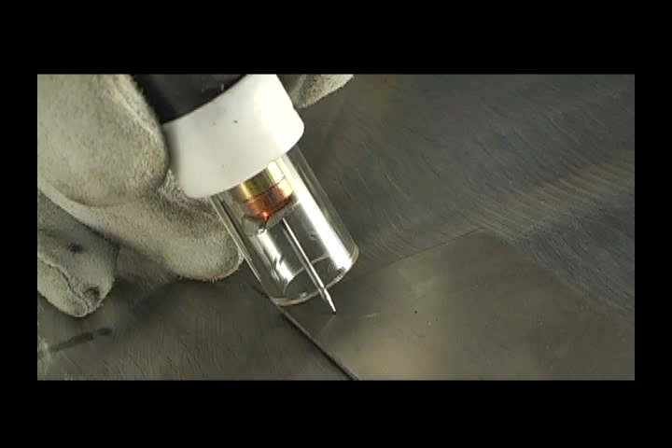We start the arc by the touch start method, which is easier than scratch starting and less likely to cause tungsten contamination. You touch the tungsten to the work, the machine senses contact, and starts the arc when you lift the tungsten off the work. One of the nice features of the 130 DC is the ability to remotely control the amperage by a foot pedal. This is an especially important feature for the novice welder as it gives you more control of the weld puddle and makes your welding much easier. Gas flow is controlled by a valve on the torch.

The InverTIG 130 DCHF is a 130 amp DC TIG stick welder which operates on a 25 amp 220 volt single phase circuit. 130 amps of power means that the 130 DCHF is capable of welding 1/8 to 3/16 inch steel depending on the application. The 130 DCHF will weld steel, stainless, 4130 tubing, but not aluminum. The 130 DCHF also has a remote amperage control by foot pedal. The 130 DCHF starts the arc by either touch starting or high frequency.

High frequency is a high voltage, low amperage electric current that is produced with a very high cycle or frequency. To give you an idea, the frequency of a 110 volt outlet in your house is 60 Hz. The frequency of the HF wave is anywhere from 16,000 Hz to 1,000,000 Hz. The HF arc is like a spark plug arc. It jumps the air gap between the tungsten and the workpiece to get the arc started, so you don't have to touch the tungsten to the work.

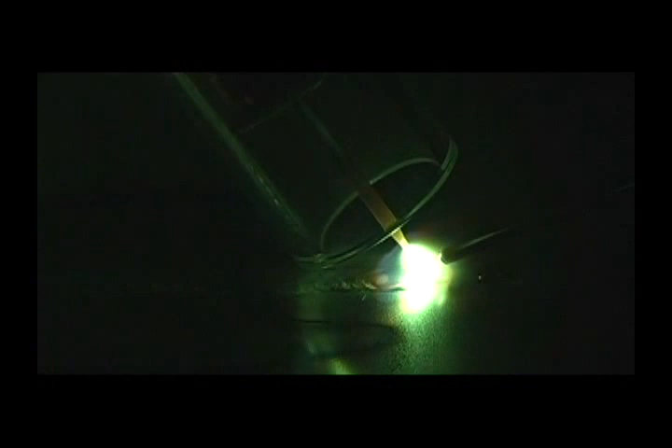This really makes starting the arc much easier and is an important feature for the novice TIG welder to have. Additionally, this non-contact arc starting eliminates any tungsten contamination. The 130 DCHF also has a gas valve in the machine to start and stop the gas flow, so you don't have to worry about manually turning on the gas.

The InverTIG 160 DC is a full-featured DC TIG welder. The 160 DC has remote amperage control by foot pedal, your choice of HF or touch starting, and a gas solenoid valve to control the shield gas. It also features the ability to operate on 110 or 220 volts, has a 160 amp output, so you can weld 1/4 to 5/16 inch steel, and a pulse feature to minimize heat input in thin gauge materials.

The HTP MTS 160 is a multi-purpose welder. This unique machine gives you the ability to MIG, TIG, and stick weld. This is a 160 amp DC touch start TIG welder with gas solenoid valve. It operates on 220 volt single phase power, and the amperage is adjusted on the front of the welder.

The InverTIG 201 is a 200 amp AC-DC inverter TIG welder. The AC mode of the InverTIG 201 welds magnesium and aluminum, and you can weld just about any other weldable metal in the DC mode. The InverTIG 201 offers you several advantages over conventional transformer-based TIG welding machines. The first and most obvious are the size and weight. The 201 weighs in at 68 pounds and is about the size of a personal computer.

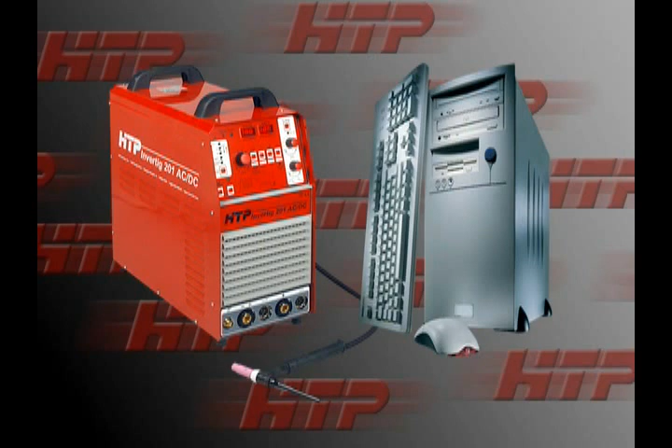The original sine wave transformer-based TIG welders are about the size of a refrigerator and top the scales at over 800 pounds. More modern square wave transformer-based machines are about the size of a small washing machine and weigh anywhere from 200 to 400 pounds. This makes the InverTIG 201 very portable and easy to fit in a small workshop.

The second major benefit of the InverTIG 201 is it consumes up to 60% less electricity than a modern transformer-based TIG welder, while at the same time producing 10% more power. That's right, an InverTIG 201 will produce a full 200 amps of welding power on a 30 amp 220 volt single-phase circuit. You may not have to pay for a costly electrical upgrade to your shop.

The 201 is what you would call an advanced square wave TIG welder. When welding AC, we are able to vary the AC frequency from 20 Hz to 200 Hz. Conventional transformer-based TIG welders have the AC frequency fixed at 60 Hz. Welding with the AC frequency set at 200 Hz allows us to focus the arc to a point, which concentrates the heat and minimizes heat input into the weld.

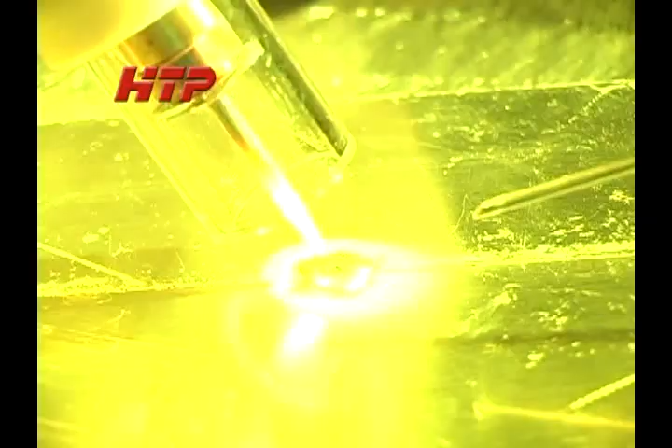The AC wave of the 201 passes through the 0 point so fast that high frequency is only used to start the arc and not necessary to reinitiate it. This minimizes HF interference. In fact, it is possible to do touch start welding in the AC mode.

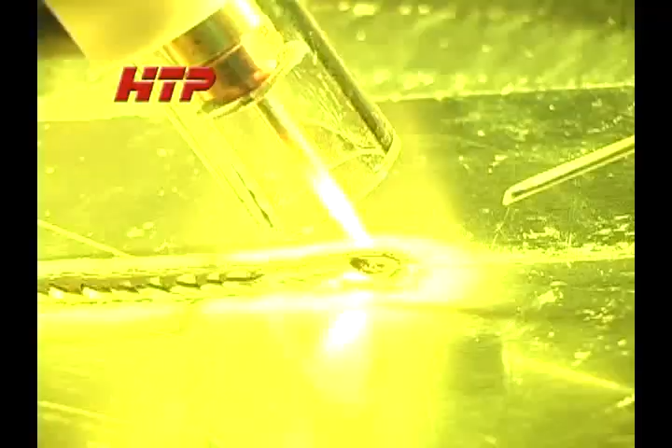And the Invertig 201 allows you to adjust the AC balance over a much wider range than conventional transformer-based machines, from 10 to 90%. A lower balance gives you more of a cleaning cycle, and a higher balance gives you more penetration.

Finally, because of the ability to control the AC wave, it is possible to weld both steel and aluminum with one type of tungsten, and that tungsten will maintain a point even in the AC mode. With the arc jumping from a point instead of a ball, you get much surer arc starts and there is less arc wandering. The Invertig 201 is truly the next generation in TIG welding equipment.

There are two main types of TIG torches, air-cooled and water-cooled. An air-cooled torch is not really cooled by air, but is cooled by the shield gas. The benefits of an air-cooled torch are they tend to be relatively inexpensive and make the machine more portable than a water-cooled torch. The drawback is they tend to be larger than a water-cooled torch for the same amperage, and they do tend to run hotter than a water-cooled torch.

One of the most common TIG torches is the 17 series shown here. This torch is rated at 150 amps with a 100% duty cycle. All HTP air-cooled torches feature a single cable design with very flexible cables. Compare this to a separate gas and power cable or a more rigid vinyl cable. The highly flexible cable design makes your welding easier and reduces hand fatigue.

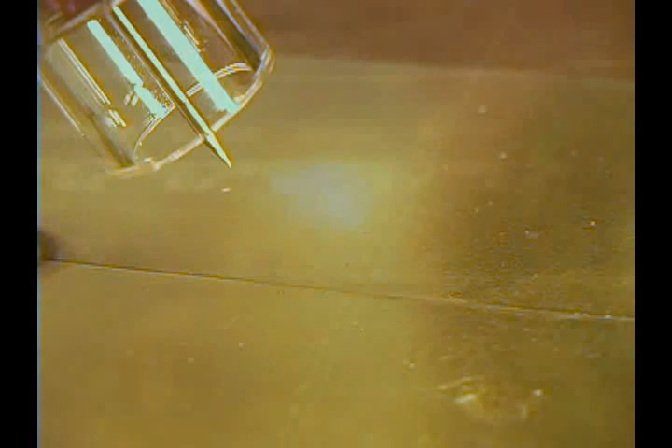Now let's look at a few accessories for TIG torches. Here are Pyrex cup kits installed on the 17 series torch. 17S is the short kit, and the standard 17 kit is the longer one. It gives us the most obvious benefit of being able to see through the cup. It also gives us a benefit of being a gas lens.

A gas lens will reduce turbulence in the cup, providing laminar flow of the shielding gas. This prevents turbulence from pulling the atmosphere into the shield gas and contaminating the weld. Using the Pyrex cup kit in conjunction with increasing the shield gas flow rate will allow you to stick out the tungsten further to get into a tight spot.

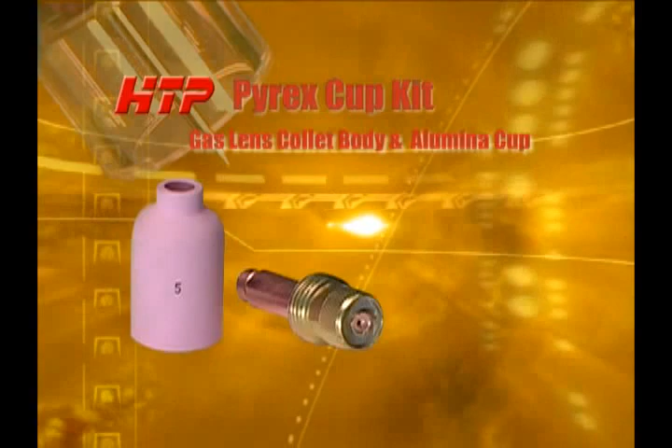Here you can see a gas lens collet body and gas lens alumina cup. These replace the standard collet body and alumina cup. They give you the benefit of laminar flow and allow you to stick the tungsten further out, but the drawback is they are larger.

There are several other torches available. Here are a few of the more popular. This is a flex head torch. The torch head actually bends in any direction to get into tight spots.

Another is the swivel head torch. This is nice for working with tubing. And this is a micro torch, which is ideal for getting into extremely tight places, such as cylinder head ports or a collector as we have here.

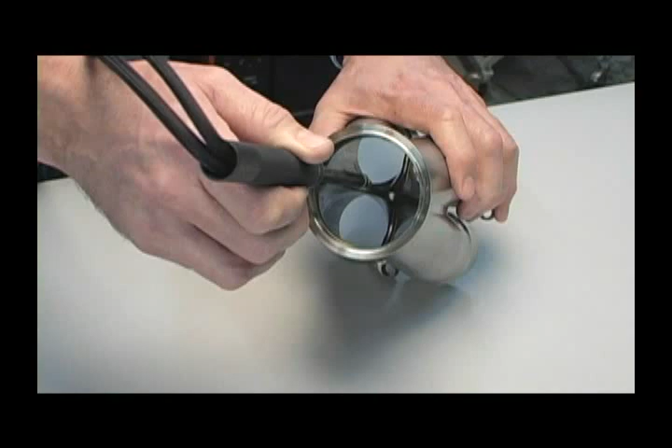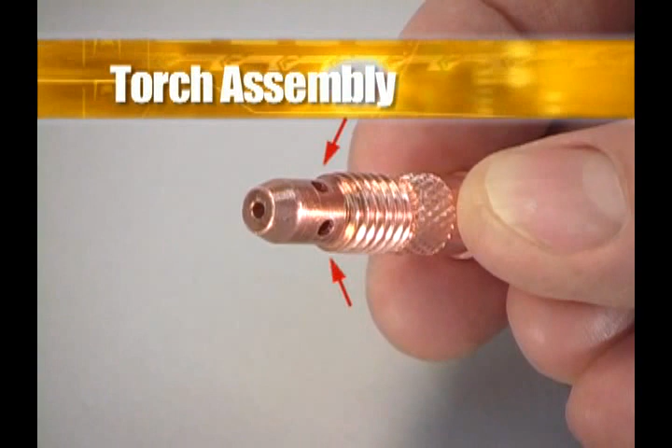Now let's assemble a TIG torch. The collet body has holes that allow the shield gas to flow out from the torch head and around the tungsten. The collet body also has a hole at the front that matches the tungsten diameter. So if we were using a 3/32 tungsten, we would need a 3/32 collet body. Thread the collet body into the front of the torch and tighten snugly by hand.

The collet is a 1 to 2 inch long piece of copper. It takes the welding current from the torch head and transfers it into the tungsten. Like the collet body, the collet is also matched to the diameter of the tungsten. You can see a slit in the collet, which allows the collet to grab the tungsten when the back cap is tightened. Place the collet in the torch so the slits will bottom against the collet body.

There are 3 different back caps: short, medium, and long. The short and medium back caps are used to gain access in tight applications, so don't throw away your short pieces of tungsten. Long is the standard back cap supplied with most TIG torches and will accept a full 7-inch tungsten. Thread the back cap into the torch, leaving it loose.

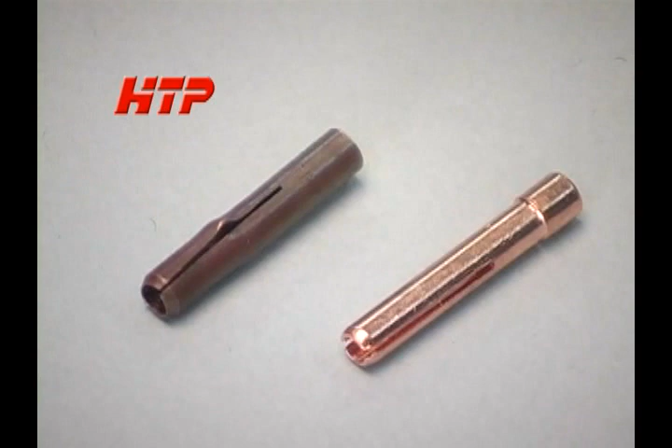Place a piece of sharpened tungsten in the collet body. As you thread the back cap in, it pushes the collet against the collet body, locking the tungsten in place much like a compression fitting. Here is an example of a 9 series collet that has been over-tightened and overheated. It's always a good idea to have spares on hand so you are not down in the middle of a job.

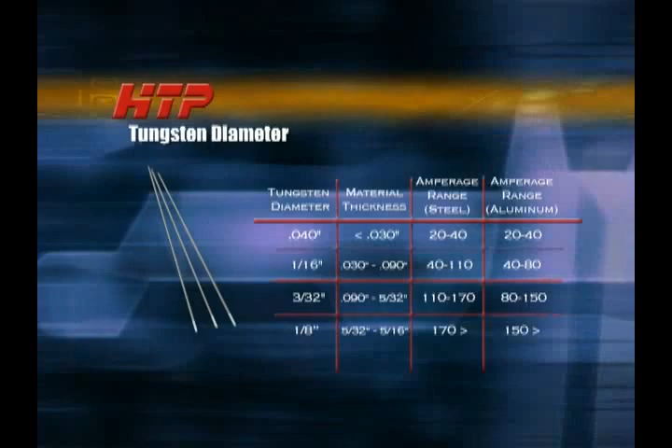Trying to use a large diameter tungsten when welding thin material will result in hard arc starting and an unstable arc. Using a small diameter tungsten on thicker material will overheat the tungsten, causing it to melt and contaminate the weld.

Also remember that AC balance will have a great effect on the tungsten diameter which you select. A lower balance, more electrode positive, more cleaning, will put more heat in the tungsten and will require a larger diameter. A higher balance, more electrode negative, more penetration, will let you get away with a smaller diameter tungsten.

Tungsten should always be sharpened so the grinding marks run along the length of the tungsten or longitudinally, never radially. Radial grinding marks will cause arc starting problems and arc wandering. It is also important that the tungsten be sharpened on a clean grinding wheel that will not contaminate the tungsten. Preferably, this grinding wheel will only be used for sharpening tungsten.

A very easy way to sharpen tungsten is to chuck the tungsten in a cordless drill and use the drill to spin the tungsten. Remember, always wear safety glasses.

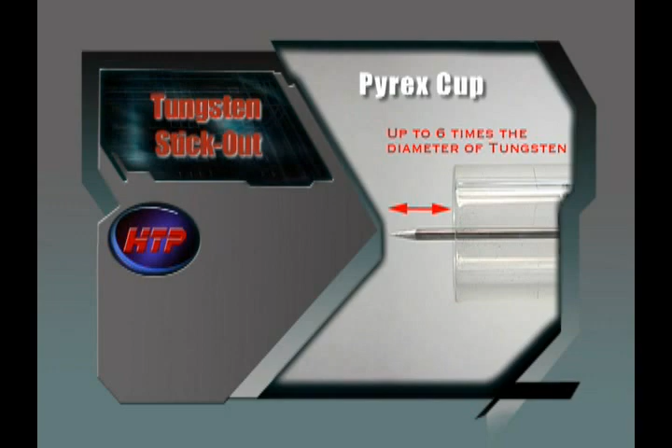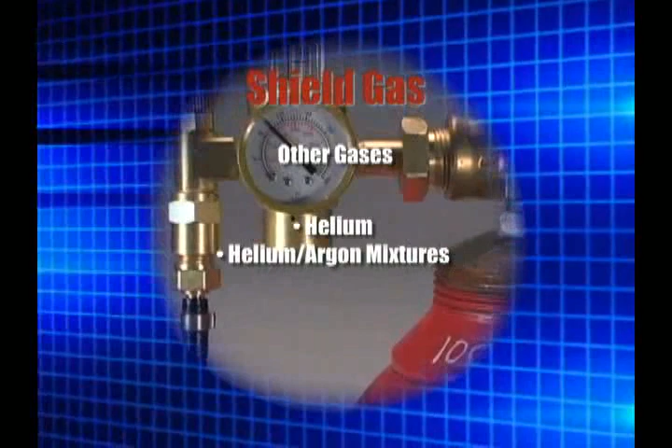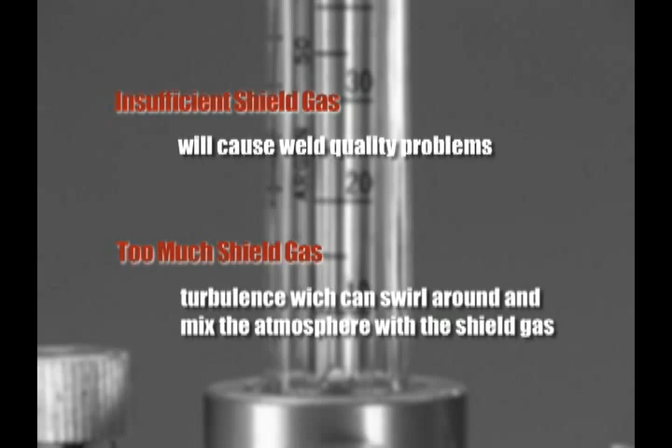In this video, the shield gas that we will be using is 100% argon. There are other shield gases available for TIG welding, such as helium and helium-argon mixtures, but they go beyond the scope of this video. Generally speaking, the flow rate will be 15 to 25 cubic feet per hour. This will be dependent on the diameter of the cup and the amount of tungsten stickout. Not enough shield gas will cause weld quality problems, and too much shield gas can cause turbulence, which can swirl around and mix the atmosphere with the shield gas.

Setting up an InverTIG 201 is very easy. The torch installs in the negative output receptacle. Just plug it in and twist it to lock into place. This is called electrode negative in DC and has the flow of electrons from the torch to the work, increasing penetration and reducing heat in the torch.

The gas supply hose from the TIG torch attaches to the gas output connection on the front of the InverTIG 201. Tighten snugly with an open-end wrench, but do not over-tighten. Note that the sealing connection is made by the gas fittings, not by the threads, so use of Teflon tape is a waste of time and may only cause problems.

The 3-pin trigger connection is used with a TIG torch that has a momentary contact switch. Since we will be using a remote amperage control, the 3-pin trigger connection will not be used. The positive output receptacle is where the ground cable is connected. Like the torch, plug the ground cable in and twist clockwise until snug.

The 5-pin connection is for the remote amperage control. HTP has 3 remote controls available for the InverTIG 201: foot pedal, slider, and rotary. These allow you to remotely control the welding amperage while you are welding.

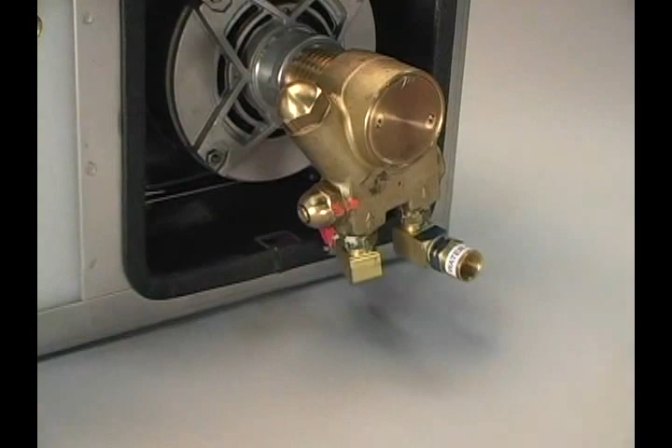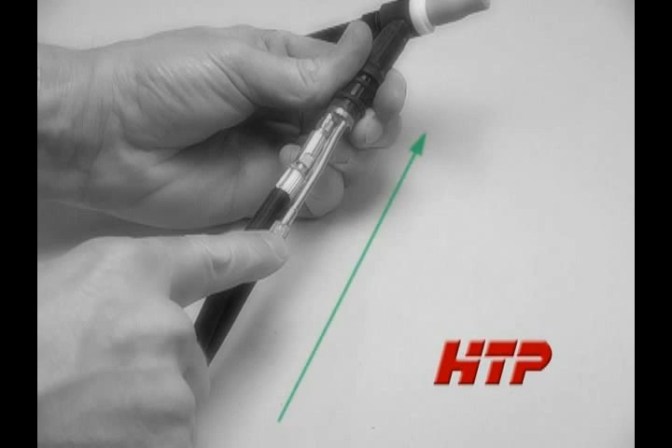If you are using a water-cooled torch, you will need to connect the water cooling lines to the water cooler. The chilled water out of the cooler is connected to the water in to the torch. The water in line is a separate line that runs directly to the torch head, supplying the torch head with cool water. From the torch head, the water flows down the power cable to cool it.

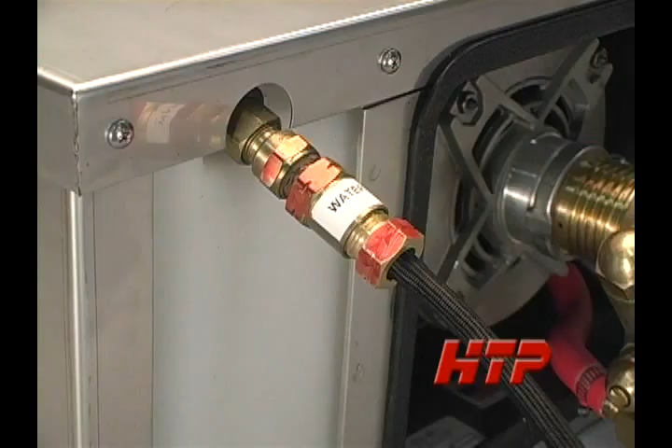In the twist lock connector, the water and the welding current get separated, and the water out goes back to the cooler through the water return line. This is the hot water out of the torch and the water into the cooler. Remember, cool water always goes directly to the torch head, and return water flows down the power cable. Let's explain what all the front panel controls do.

Although specific to the Invertig 201, many of these controls can be found on other machines, so this may help you understand how to adjust your specific machine if you do not own a 201. When we turn the machine on, you will see the green power indicator lamp lights up. This indicates the 201 is connected to a 220 volt power supply, and the 201 only requires a 30 amp 220 volt single phase circuit.

The welding current lamp will be illuminated when there is welding current at the TIG torch or the electrode holder. This is when the foot pedal is depressed in one of the TIG welding modes, or if the unit is in the stick welding mode, the welding current light is always on.

If the thermal switch light becomes illuminated, you have exceeded the duty cycle of the machine and it will not weld. Leave the machine on and let the cooling fans continue to run. When the thermal switch light goes back out, the machine will be ready to weld again.

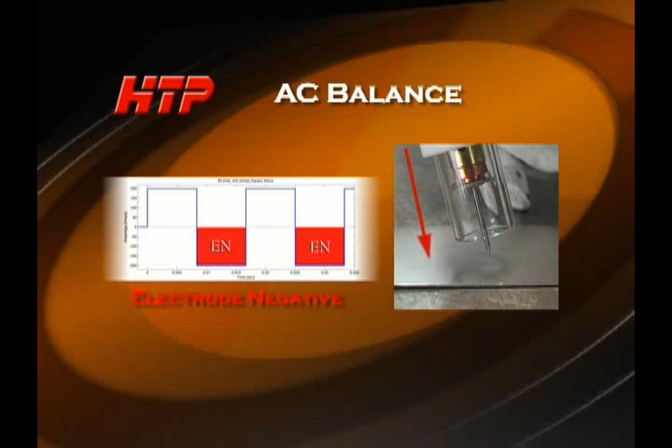The best way to explain AC balance is to look at the square wave graph. This is a 60 Hz balanced AC square wave. An AC wave is said to be balanced when there is an equal portion of the wave electrode negative, electrons flowing from the torch to the work, increasing penetration, and an equal portion of the wave electrode positive, electrons flowing from the work into the torch, providing more cleaning and putting more heat in the torch and the tungsten.

An AC wave is necessary for welding aluminum because when the electrons are flowing from the workpiece to the torch, it helps float impurities to the surface of the puddle and also breaks up the aluminum oxide which forms on the surface of all aluminum which is exposed to the atmosphere.

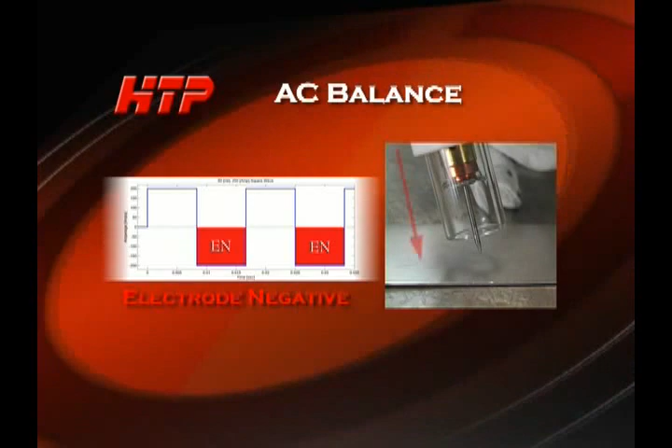In certain instances, such as welding a thick piece of aluminum, we may want more penetration, electrons flowing from the torch to the work, so we increase the AC balance. And in certain instances, such as an oily casting, we may want more cleaning, electrons flowing from the work to the torch, so we decrease the AC balance. The balance control lets us change the percentage of the wave that is electrode negative.

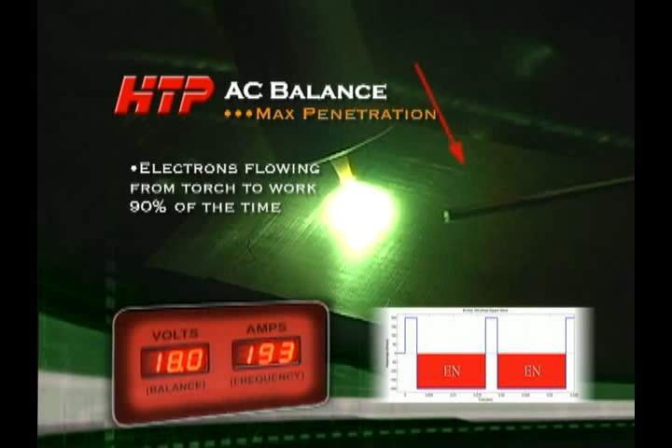So let's look at this again. With the balance set to maximum penetration, which in the case of the Invertig 201 is 90% of the time, the electrons are flowing from the torch into the work and putting heat into the work, providing maximum penetration.

This is a piece of 3/4 inch thick aluminum. Generally, with a 200 amp TIG welder, you would not be able to get a molten puddle to start a bead. But with the Invertig 201, you can see with the balance at 90%, frequency at 200 Hertz, we have enough heat to get a molten puddle and run a bead.

Now let's set the balance to maximum cleaning, which in the case of the Invertig 201 is 10%. 90% of the time, the electrons are flowing from the work into the torch and putting the heat into the torch. You have to keep in mind that when you change the balance, you are putting heat into the torch and also putting heat into the tungsten. At the same time, this is floating the impurities off the surface of the work and giving you more cleaning action.

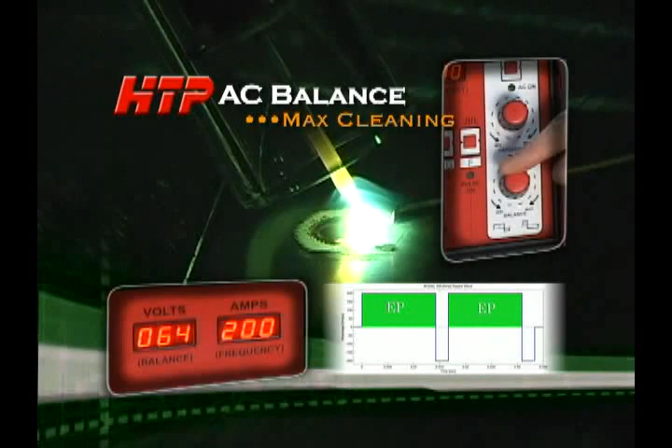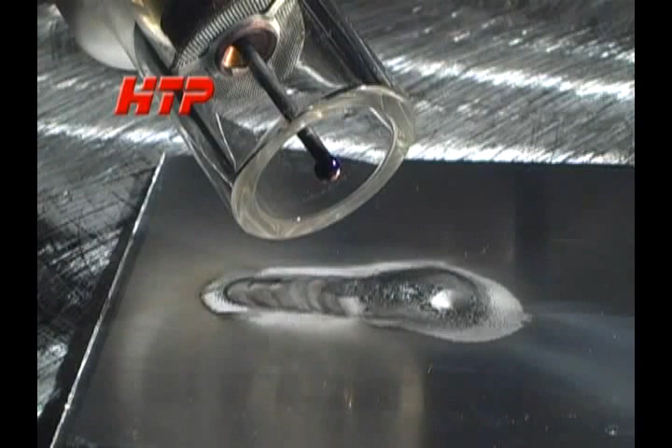Let's see the effect the AC balance has on tungsten heat. We start welding at 60 amps with the balance set to 65%. A 1/16 inch tungsten works just fine. As we decrease the balance, you can see the tungsten starts to overheat and melt at about 40%, and by the time we get to 25%, it is fully molten. You can see how the melting tungsten has contaminated the last portion of the bead. If you reduce the balance, you may have to go to a larger diameter tungsten.

You can adjust the balance when the machine is in the AC mode. Simply turn the balance knob, the volts display flashes and shows the balance in percent. The Invertig 201 allows you to adjust the AC balance from 10 to 90%, over a substantially greater range than is possible with conventional transformer units, 40 to 60%. So remember, higher balance, more penetration, lower balance, more cleaning.

The welding mode control lets you select one of several welding modes. In the stick mode, the machine is set up for arc welding. The 201 will let you vary the amperage in the stick mode with the foot pedal if you have the remote on and the pedal plugged in. The welding current is always on. The 2T mode is the most common. Push the foot pedal and the machine welds. Release the foot pedal and the machine stops. This will be the mode we will use throughout the video.

The 4T mode is like a lock-on trigger on a drill and is used with the momentary contact switch. Push and hold the trigger for pre-flow. Release the trigger to slope up to welding current. Push and hold the trigger for slope down and post-flow. Release the trigger to stop. Do not use the 4T mode with the foot pedal.

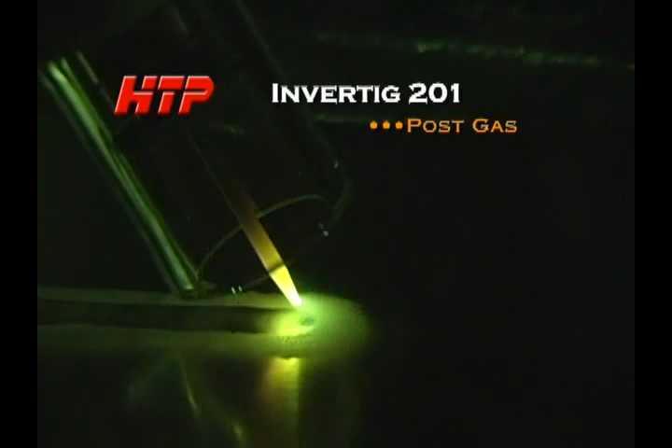Post-gas flow is necessary because after the arc is extinguished, if the gas stopped flowing immediately, there is a possibility the molten weld puddle would come in contact with the atmosphere, causing weld defects. Additionally, it prevents the tungsten from becoming contaminated by the atmosphere. The gas flow should run long enough to allow the orange color of the tungsten to disappear. It is important to remember not to remove the TIG torch from the weld until the post-gas cycle has been completed.

A good starting point for the post-gas flow is 5 seconds. If you are welding at higher amperages or on more critical alloys, it may be necessary to increase the post-gas flow to a higher value.

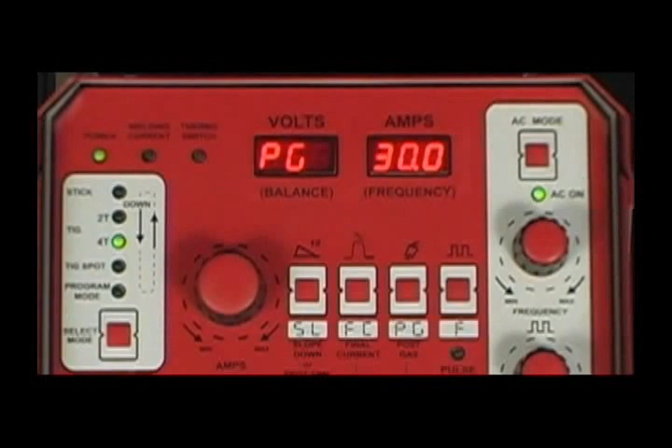To adjust the post-gas time, depress and release the post-gas button. The volts display will flash PG for post-gas, and the amps display will flash and display the post-gas time in seconds. While both displays are flashing, adjust the amps knob to set the post-gas flow time in seconds. The post-gas flow is adjustable from a half a second to 30 seconds in 1/10 of a second increments.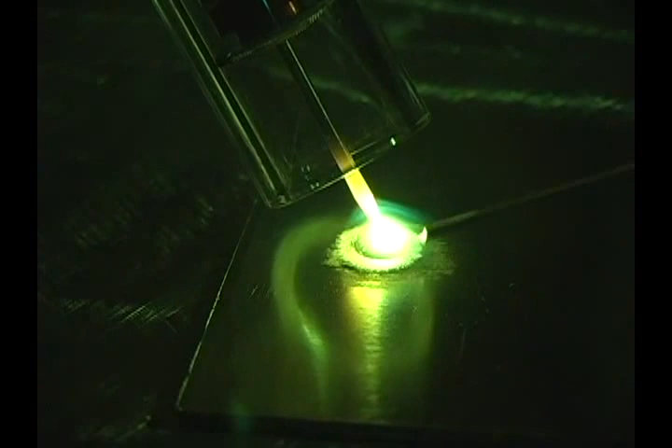We would like to show you the effect of post-gas. First example is enough post-gas. 1/16 inch tungsten, red hot, cools completely while the post-gas is flowing. The second is not enough post-gas. The gas stops and the tungsten turns black.

If you have discoloration in your tungsten and you did not contaminate it by sticking it in the puddle or hitting it with the filler metal, then you are probably not running enough post-gas.

The pulser alternately raises and lowers the welding current between the peak current and the final or background current. This is done a certain number of times per second, which is the pulse frequency. Furthermore, you can vary the amount of time you will be welding at peak current, which is the pulse duty cycle. Pulsing can reduce heat input on thin materials and give you better control of penetration and bead width. Using low pulse frequency can sometimes make it easier for the novice welder to time the addition of filler metal into the puddle.

Depressing the pulse on button will illuminate the green light indicating your InverTIG 201 is in the pulse mode. At this time, the volts display will show DUT for the pulsing duty cycle or the amount of time the machine is at the peak current. The amps display will show FRE for the pulsing frequency or the number of pulses per second. Whichever display is flashing is the one which can be adjusted by the amperage adjustment knob. If the DUT is flashing and you want to adjust the frequency, simply depress and release the pulse on button and the FRE display will begin flashing so you can adjust it.

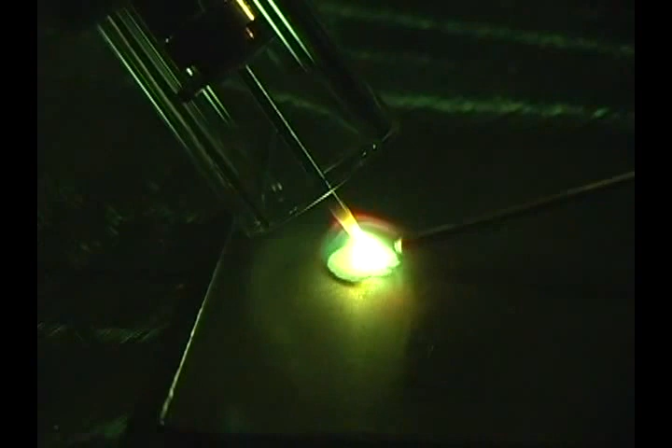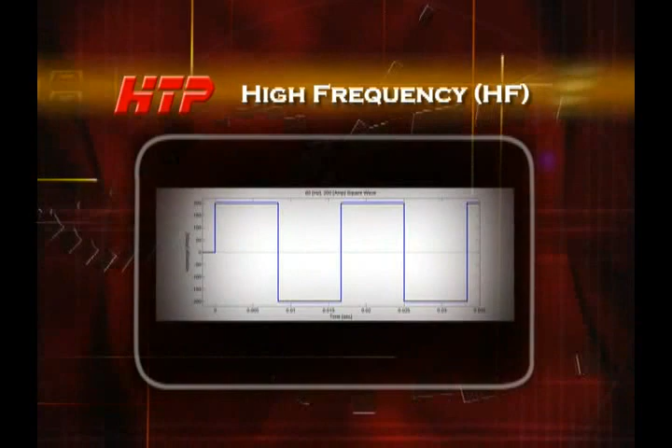Depressing the HF on button so the green light is illuminated turns the high frequency arc starting on. When the foot pedal is depressed, a high frequency arc will jump from the tungsten to the ground, initiating the arc. This makes it very easy to start the arc. Additionally, since the wave of the Invertig 201 travels so fast through the 0 point in the AC mode, the high frequency is used only to start the arc. Conventional transformer welders must have the high frequency on all the time to maintain the arc, which can cause interference.

HF is a high voltage, low amperage electric current that is produced with a very high cycle or frequency. The HF arc is like a spark plug arc. It jumps the air gap between the tungsten and the workpiece to get the arc started so you don't have to touch the tungsten to the work, which eliminates the chance of tungsten contamination.

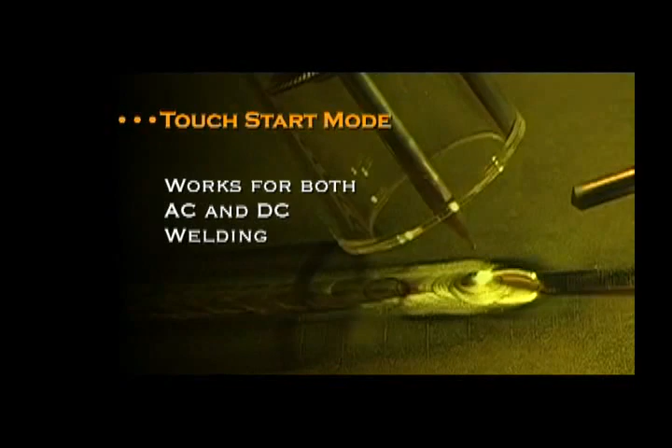When the high frequency is off, it is possible to do touch start welding. The touch start mode allows you to initiate the welding arc without high frequency. This is important in any environment where the high frequency arc will cause interference with sensitive electrical components or computers. A good example of this would be stainless steel or aluminum repair in hospitals. The touch start mode works for both AC and DC welding. In this video, we will be using the HF starting method.

When the remote is on, the green indicator lamp will be illuminated, and the amperage is infinitely adjustable by either the foot pedal, rotary torch-mounted amperage control, or the sliding torch-mounted amperage control. This makes your welding easier by allowing you to control the amperage while you are welding. When the remote is on, the starting amperage is displayed in the amps readout. It is currently reading 4 amps.

If you wanted to start at a higher amperage, push the remote on button. REM is flashing and displayed in the volts display, and the starting amperage is flashing and displayed in the amps display. While both displays are flashing, adjust the amperage adjustment knob to adjust the starting amperage to the desired setting. I will adjust the starting amperage from 4 amps to 25 amps.

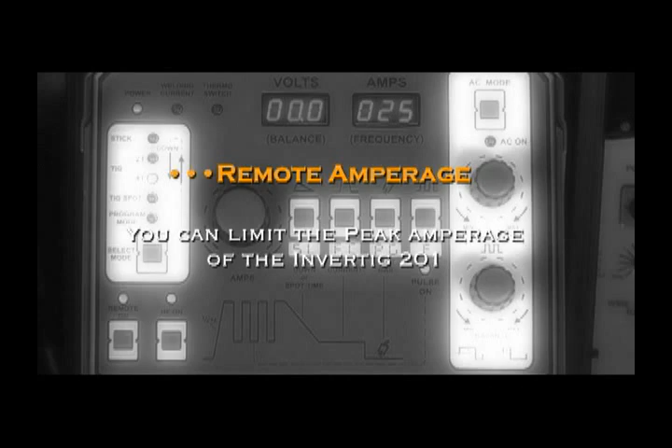It is possible to limit the peak or maximum amperage of your 201. To limit the amperage of the machine to 100 amps, depress the remote on button for 5 seconds until the green indicator lamp turns off. You will see 200 amps in the display, which is what the machine is currently set to. Using the amperage adjustment knob, adjust the amperage to 100 amps.

Depress the remote on button for 5 seconds until the green indicator lamp turns on. The display now reads the starting amperage, which we just set to 25 amps. Now, when you fully depress the foot pedal, the maximum amperage will be 100 amps. This makes the foot pedal less sensitive and makes it easier to control your puddle. Now I am going to set the starting amperage back to 4 amps.

When the remote is off, the green light will be off and the amperage is adjusted by the amperage adjustment knob on the front of the welder. The machine will weld at the fixed amperage that it is set to.

So now, let's condense this into a quick setup. Welding mode 2T. AC on for aluminum, off for steel. Frequency 200 Hz for aluminum, not applicable in the DC mode. Balance 65% for aluminum, not applicable in the DC mode. Slope down 1/10 of a second. Final current, not applicable in 2T.

Post flow 6 seconds. Pulse off. HF on. Remote on. Ground plugged into positive. Torch connected to negative. 100% argon gas, 15 to 20 cubic feet per hour flow rate. Okay, let's start welding.

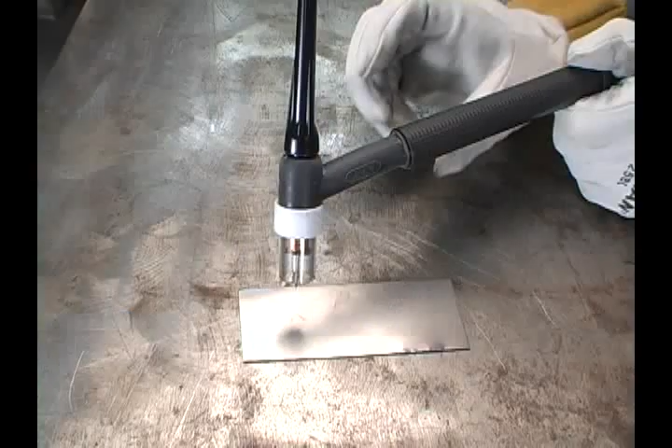Third, it is important to be as comfortable as possible when welding. I try to hold the torch like a pencil and steady my hand with the base of my palm or little finger. Try to hold the torch perpendicular to the work and incline slightly in the direction of motion.

Welding steel. Once again, we are going to give you the basics for machine setup. 2T mode. AC off. Frequency not applicable in DC. Balance not applicable in DC. Slope down 1/10 of a second. Final current not applicable in the 2T mode. Post flow 6 seconds. Pulse off. HF on. Remote on.

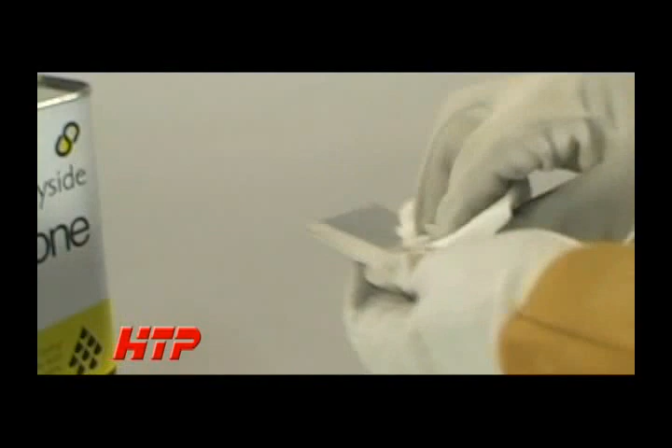It is important to work with clean material. Acetone would be our first choice for cleaning the metal. If acetone is not available, lacquer thinner can be used, but it leaves a slight residue. Do not use brake clean, as the arc reacts with this cleaner to produce dangerous gas, which is very harmful and will make you sick.

We will start by running a bead on 062 mild steel. Peak amperage is set to 80 amps, and we will probably be welding at 60 amps. Tungsten is 1/16 2% ceriated. Before you can even think about joining two pieces of metal together, you want to become proficient in just being able to run a bead, without even putting filler metal in.

The object of this exercise is to keep the tungsten between 1/8 and 3/16 of an inch off the work and move it in a very constant motion. TIG welding is all about the puddle and controlling the puddle. You do not start to move the torch until you can see the molten orange puddle. It should be about 1/8 to 3/16 of an inch in diameter.

What you are looking for is a constant bead width and being sure you do not touch the tungsten to the work. When you want to stop welding, slowly lift the foot pedal until the arc extinguishes, and remember to leave the torch in the same position until the shield gas stops flowing.

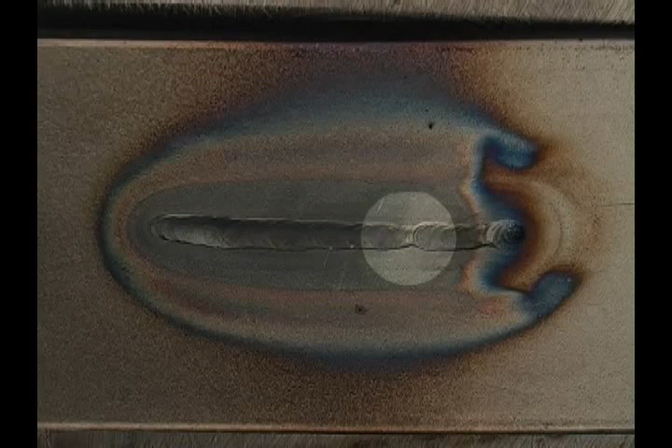Here is the finished weld. You can see the bead width is very consistent, except for the narrowing about 1/2 an inch from the end. What happened is we skipped a little, increasing our torch travel speed, causing the bead to become narrow. You can also see a very consistent heat affected zone, and at the very end you can see the effect of the post gas flow. The shield gas continues to flow, protecting the weld from the atmosphere, preventing a color change.

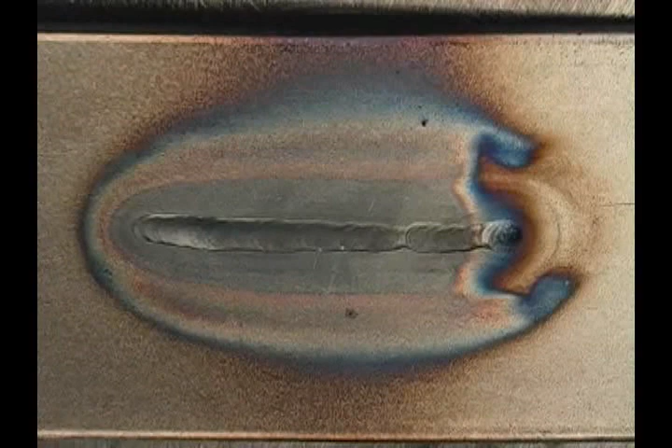If we made this weld in a purge chamber, which is a chamber filled completely with argon, the weld would not change color. Since mild steel is not a reactive material like titanium or Inconel, once the molten puddle solidifies, further cooling without the protection of the shielding gas will not affect the quality of the weld.

When you have mastered running a bead without using any filler metal, can maintain a consistent bead width, keep your tungsten 1/8 to 3/16 of an inch off the work, and not touch the tungsten to the work, then you can progress to the next step in learning to TIG weld, which is to run a bead with filler metal. Before you can even think about trying to join two pieces of metal together, first you need to master running a bead without filler, and then you need to master running a bead with filler.

Again, the key is in the puddle. You have to operate the foot pedal and control your torch so you can keep the bead width consistent. We establish the arc and gradually push down on the foot pedal to increase the amperage to start a molten puddle. When we have a molten puddle about 3/16 of an inch in diameter, start to add the filler metal to the leading edge of the puddle.

Continue to dab the filler metal into the leading edge of the puddle. If you can dab the filler metal, say every 1/2 second, just like a robot, at a constant rate, it will give you that nice row of dimes look. While you are dabbing the filler, remember to move the torch at a constant speed and height, and adjust the foot pedal to control the puddle and maintain a constant bead width. You dab the filler into the leading edge of the puddle.

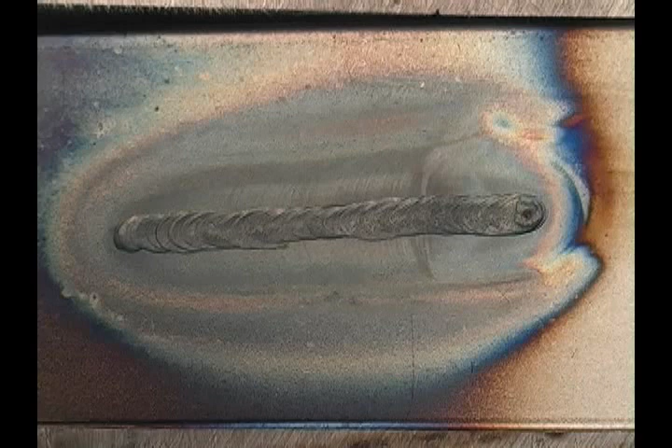You can see the finished weld has a consistent bead width with a nice row of dimes appearance. Again, the heat affected zone is relatively narrow and also consistent. Remember, melt the filler by dabbing it in the molten puddle. Do not try to melt the filler with the heat from the torch. Practice running a bead with filler until it becomes second nature, making sure you don't touch the tungsten with the filler and you don't touch the tungsten to the work.

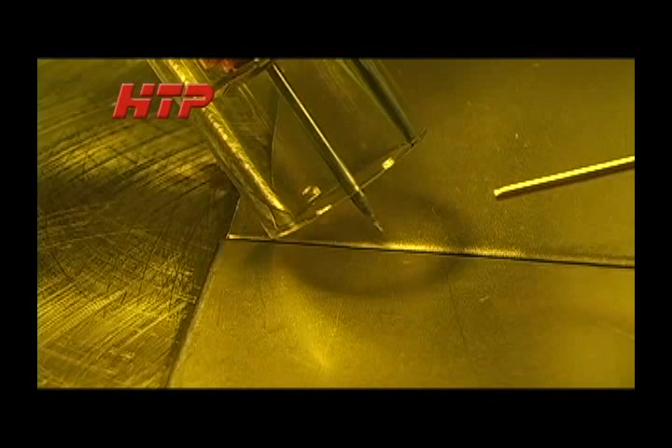When you have mastered running a bead with filler, you can try to join two pieces of metal together using the butt weld technique. A butt weld is two pieces of metal laid edge to edge. We are going to butt weld two pieces of 18 gauge steel together. 18 gauge steel is 48 thousandths of an inch thick. We will start by tack welding the coupons together so they don't warp.

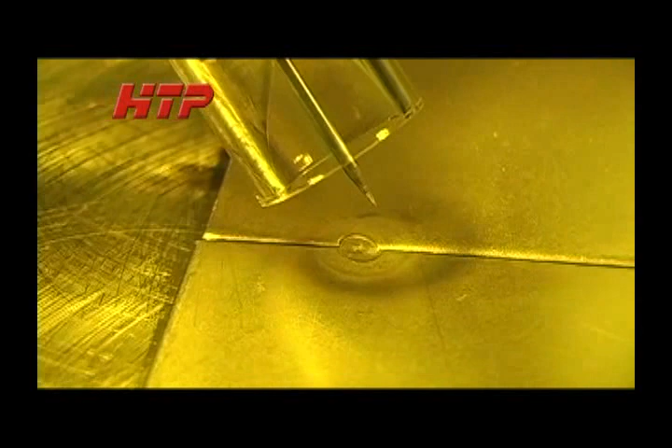Depress the pedal to start the arc. Increase the arc by pushing the pedal further until you get a molten puddle, and dab the filler to make the tack. Repeat the process every 2 inches or so. Again, depress the pedal to get a molten puddle and dab the filler metal in. Keep the tungsten centered over the joint where the 2 panels meet and dab the filler into the molten puddle. Don't melt the filler with the flame of the torch.

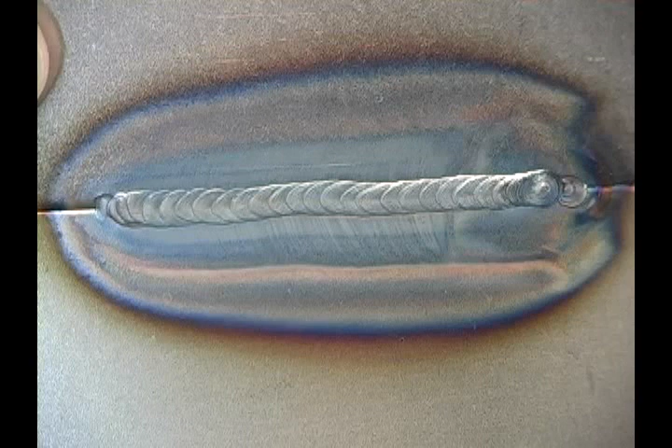We are running about 50 to 55 amps. When you get to the end of the weld, gradually back off on the pedal until the arc extinguishes, and remember to leave the torch in the same position until the post-gas flow stops. Look at this beautiful weld. You have an extremely consistent bead width with that very nice row of dimes look.

Once you have become proficient in laying down a nice bead on a butt weld, the next weld to learn is the lap weld. A lap weld is where one panel is placed on top of the other panel. We will tack the panels together to prevent warpage. When you initiate the arc, keep the arc and the heat on the lower panel. The arc will always try to go to a sharp edge, so you may have to move the torch to force the arc to the lower panel.

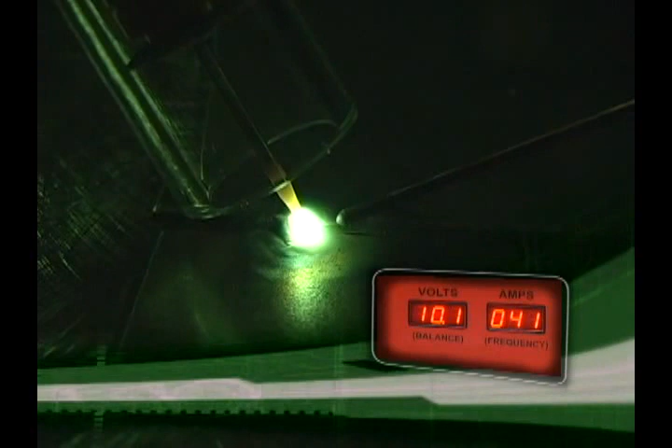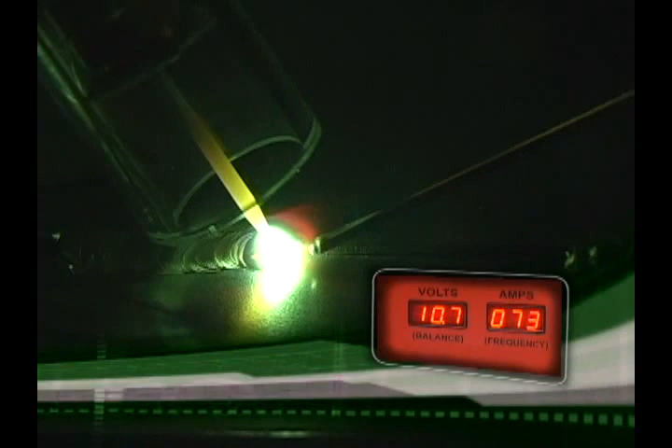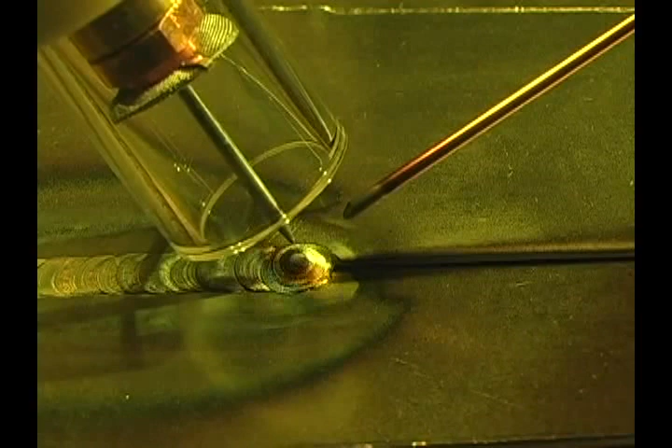Get a molten puddle started on the lower panel. Then dab the filler into the molten puddle and get the molten puddle to wick up into the top panel. If you apply too much heat to the upper panel or let the arc start and stay on the upper panel, the edge will just overheat and melt away. The finished weld is a nice consistent weld. You can see the heat affected zone is also consistent.

Fillet weld. The fillet weld is 2 panels at 90-degree angles. This is the hardest weld because it is very easy to melt away the edge of the upper panel. The heat should be concentrated on the lower panel using the molten puddle to wick up into the upper panel, similar to a lap weld. Let's watch. Again, it's all about controlling the puddle. The rod is again dabbed into the leading edge of the molten puddle. Here is the finished weld.

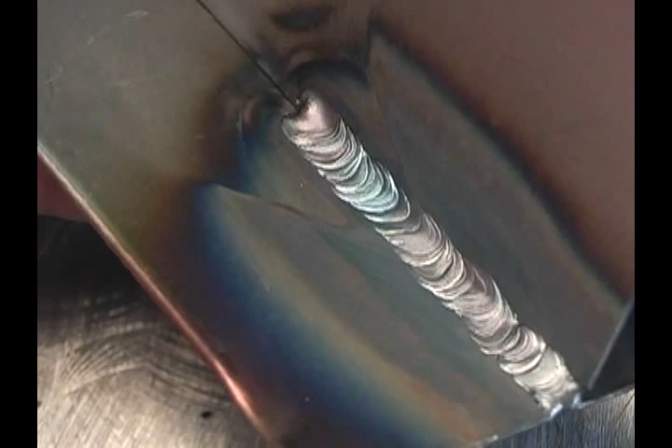Pulse welding is when the InverTIG 201 automatically pulses the welding current. The InverTIG 201 allows you to control the pulse frequency, which is the number of times per second the machine pulses, the pulse duty cycle, or the percentage of the time during the pulse that the machine will be at the higher welding current, and the final current, which is the current the machine pulses down to in a percentage of the peak current or the welding current.

First, we are going to show you a slow speed pulse. We are set at 2 Hz or 2 pulses per second, a duty cycle of 40%, and a final current of 25%. A slow speed pulse can be used to help you time dabbing the filler metal. You can see we are dabbing the filler metal every time the machine pulses. It is important to note that you never want the duty cycle or the background current set so low that the molten puddle will completely solidify, as this may cause cracking.

In the second pulse example, we have raised the pulse frequency to 200 Hz or 200 pulses per second. You can only hear the machine pulse, not see the actual pulses since they happen so fast. The duty cycle is 40% and the final current is 25%. This really increases our travel speed, minimizes heat input while assuring penetration.

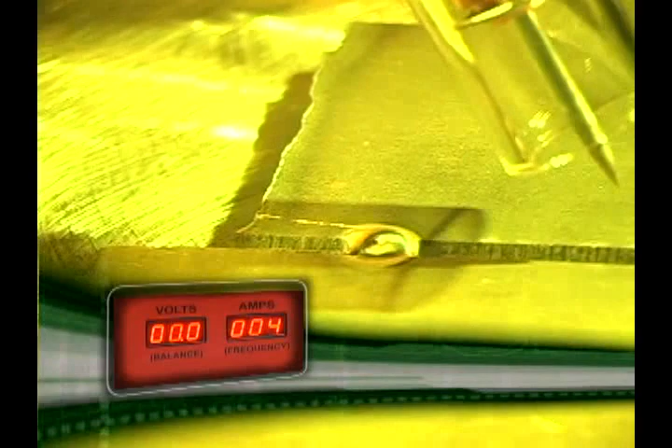Even with material as heavy as a 1/4-inch steel, it is still necessary to tack weld the two pieces of metal together to prevent any distortion. We ran about 180 amps to tack this together. You will also notice we have beveled the edges of the material slightly to increase penetration.

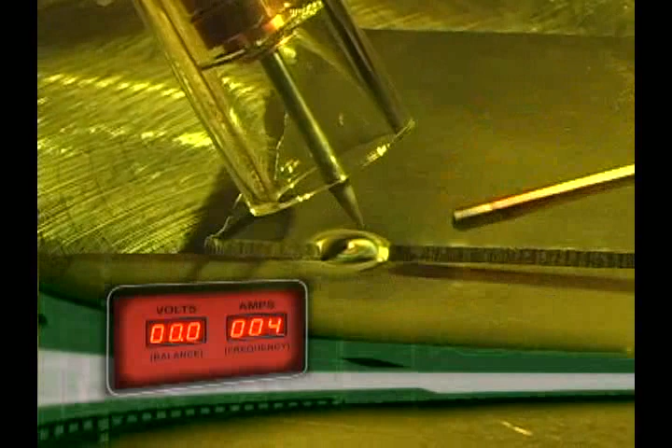Remember, the technique is the same whether you're welding sheet metal or 1/4-inch steel. The difference is we have to put more heat into the metal, which means more amperage. By increasing the amperage, you will have to take into consideration the effect the amperage will have on the tungsten, so we increase the diameter of the tungsten from 1/16 of an inch to 3/32 of an inch. We are running close to 160 amps and adding more filler metal, but again, the basic process is the same.

Isn't that one of the nicest welds you have ever seen? Consistent bead width, beautiful row of dimes appearance. This is a weld you could really show off.

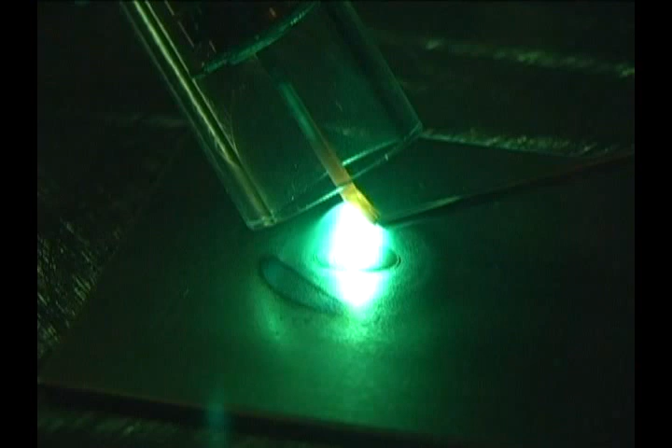We start welding, going along fine, and then it happens. You wobble a little and hit the tungsten with the filler metal. The tungsten is so hot it immediately melts the filler metal. The color of the arc changes to kind of a bluish halo, and the shape of the arc changes from a cone to a sphere.

By the third hit, you can see a large glob of molten steel on the tungsten, and the steel is melting off the tungsten, changing the arc and contaminating the weld. The only thing to do is to stop welding, remove the tungsten from the torch, cut the contaminated tungsten off, and resharpen it.

Here is another common mistake. Let's face it, we have all done it. You are welding along, trying to keep your tungsten as close to the work as you can, and you touch the tungsten to the work. In this instance, the tungsten stayed in the puddle too long and extinguished the arc. The tungsten became stuck in the molten puddle when the arc extinguished and the puddle cooled. The tungsten must be removed from the torch and sharpened.

Aluminum welding. Let's review a quick setup on the machine. 2T mode. AC on. AC frequency 200 Hz. AC balance 65%. Slope down 1/10 of a second. Final current not applicable in 2T. Post flow 6 seconds. Pulse off. HF on. Remote on.

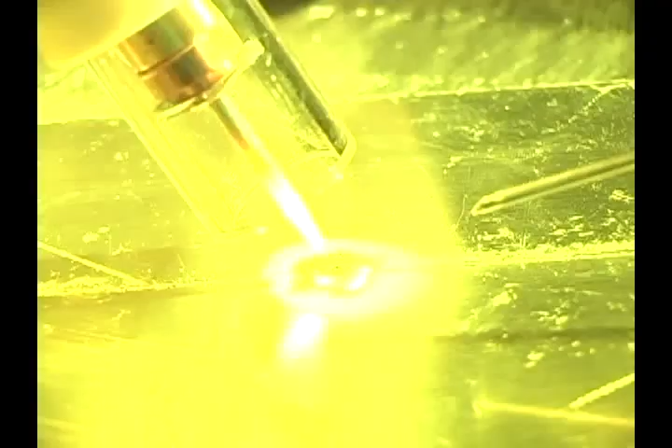Aluminum has some unique characteristics which differ from steel. Aluminum does not change color when it is hot or molten. The only way you can tell when aluminum is molten is the puddle becomes shiny. Aluminum forms an oxide as soon as it is exposed to the atmosphere. The problem with the oxide is it melts at 3700 degrees Fahrenheit, much higher than the melting point of pure aluminum, which is approximately 1200 degrees Fahrenheit.

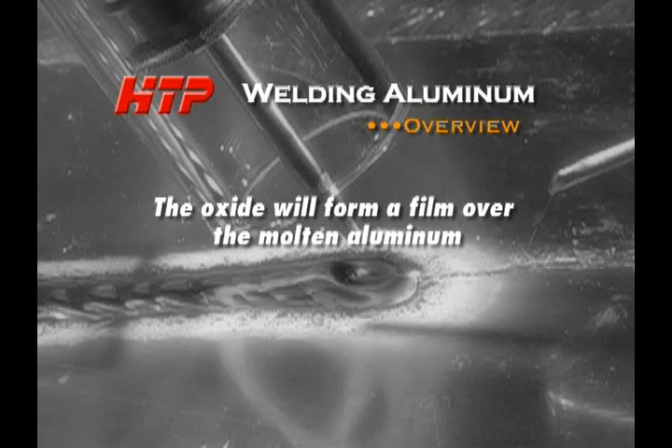The oxide will form a film over the molten aluminum, so it is highly desirable to remove the aluminum oxide. The oxide can be removed with a stainless steel wire brush or a Scotch-Brite pad and then wiped down with acetone or lacquer thinner.

When welding aluminum, the filler metal should be matched to the base metal as best as possible. However, in a repair application, many times we don't have the luxury of knowing what alloy we're actually working with. Generally speaking, 4043 is a good general filler metal for most welding applications. However, 4043 should not be used if the piece will be anodized, and a 5356 alloy should be used instead.

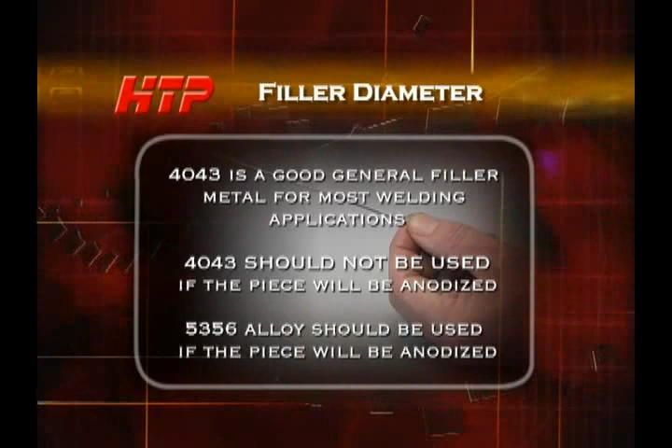Remember, 2000 series and 7000 series aluminum is generally not recommended to be used if the application requires welding, so try to stay away from those alloys. Use the following chart as a guide.

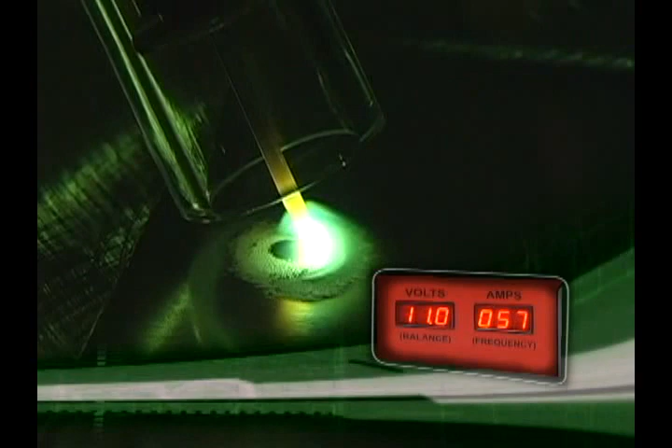The process for welding aluminum is very similar to steel. Once again, you are going to need to lay down a bead without any filler metal to start. You are trying to move the torch at a constant speed to give you a constant bead width while keeping the tungsten between 1/8 and 3/16 of an inch off the work.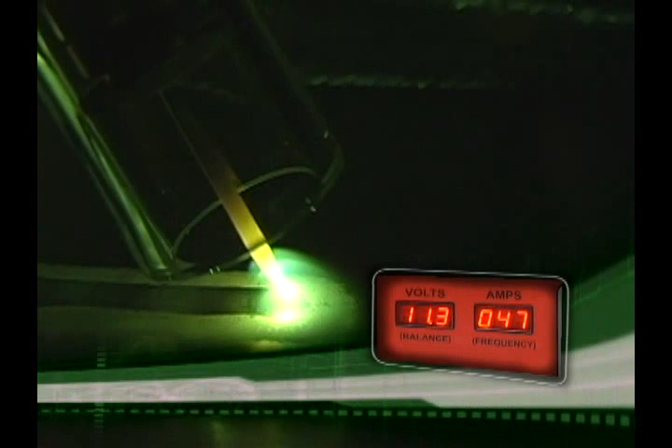One of the differences between steel and aluminum is aluminum does not change color when it is molten. It just becomes very shiny. So the only way you can tell when you have a molten puddle is when you see the shiny area.

I could probably have done a better job. I should have cleaned the aluminum better. There was some type of residue on the piece causing a dark sooty area. As the piece heated up, this burned the residue off, which is why we don't see the soot as the bead continues. You can also see I failed to back the pedal off to compensate as the aluminum heated up and the bead is too wide, and then it starts to fall away from excessive heat.

The last segment of the weld is very nice, very consistent bead width. I have picked up the travel speed and backed off on the pedal to achieve this. Once you have mastered a bead without filler, then you can try a bead with filler.

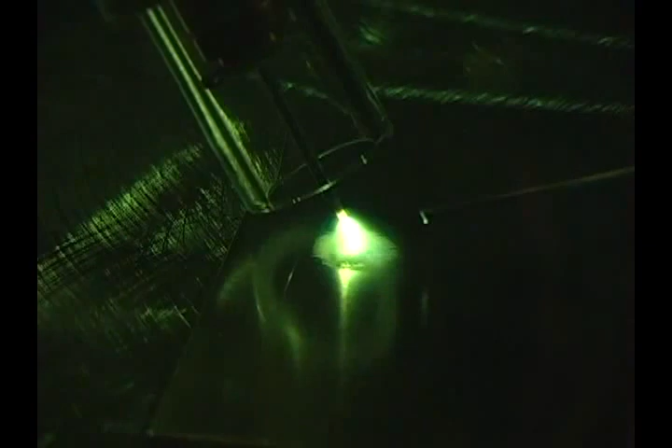Depress the pedal to start the arc. You need to look for the shiny puddle in the middle of the dull area. That's the molten puddle. Once you have the molten puddle, you begin to dab the filler in the leading edge of the molten puddle just like steel. Dab at a constant rate and move the torch at a constant speed to achieve that nice row of dimes look.

Now isn't that a nice weld? Very consistent, nice in appearance. Remember, you have to practice, practice, and practice. Just a continuation of running a bead with filler, only now you are joining two pieces of metal together. As with steel, you need to tack the panels together.

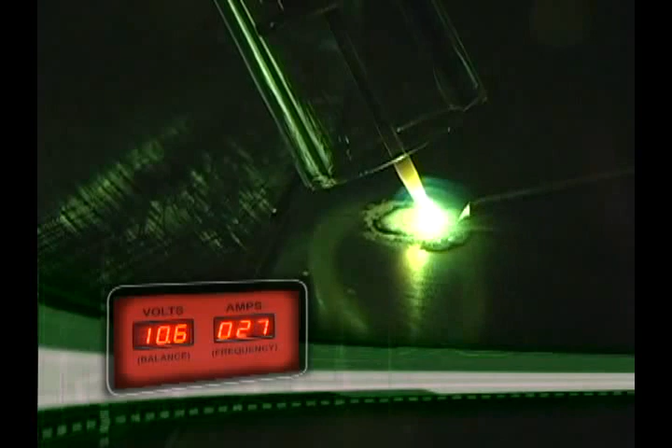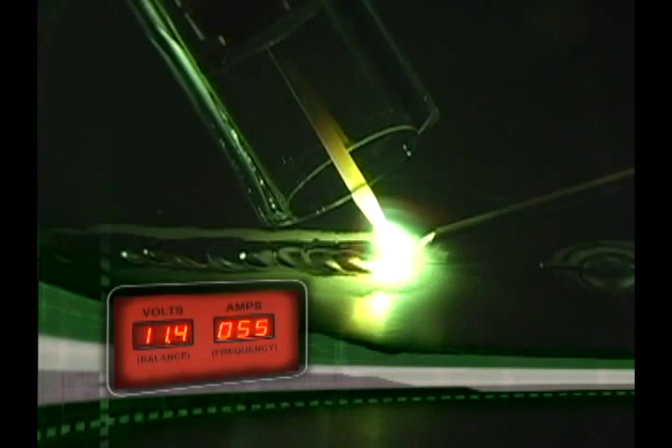Once you get the panels tacked, you will now run a bead down the center of the panels, dipping the filler into the leading edge of the molten puddle. Remember, when you are going to end your weld, gradually back off on the pedal. This prevents a crater from forming when the weld pool solidifies. Also, leave the torch in the same position until the post-gas flow stops to keep the flow of argon around the weld until it cools.

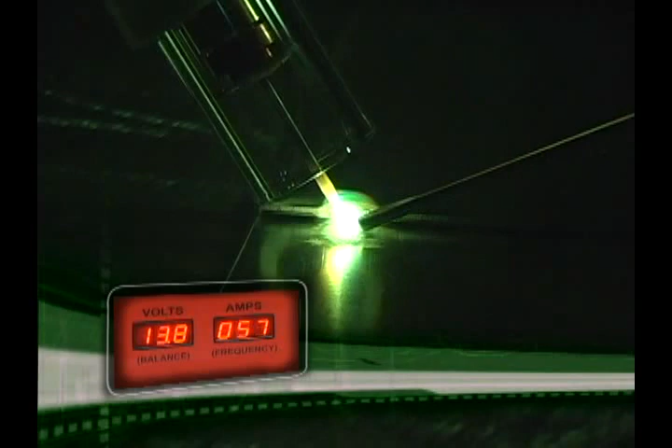Here is the finished weld. I'm just a little inconsistent at the beginning, but you can see a pretty nice row of dimes look to the weld. Aluminum lap weld. This is trickier than a butt weld. You have to remember the arc will always be attracted to a sharp edge, so you want to initiate the arc on the lower panel away from the edge of the upper panel.

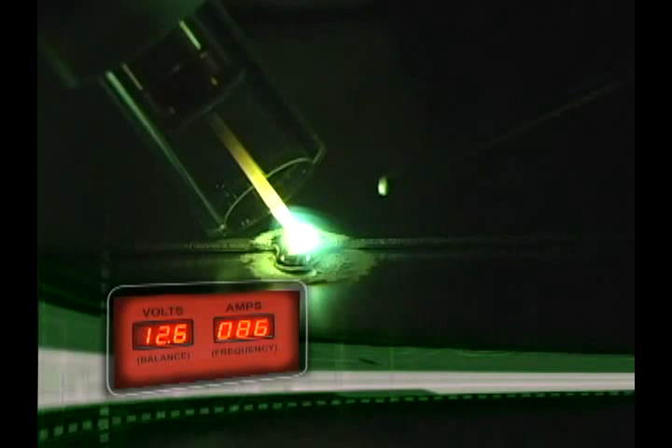As you increase the amperage, bring the torch closer to the upper panel, get a puddle going on the lower panel, dip the filler into the puddle, and again, let it wick into the upper panel. Once the panels are tacked, the easiest place to start your bead is on a tack weld. Get a molten puddle and start moving. Again, dab the filler metal into the molten puddle.

Here is the finished weld. You can see a little bit of contamination at the end of the weld. Again, we should have done a better job cleaning the panels. You can see there is a very narrow heat affected zone and a nice consistent bead width. Once you have mastered the aluminum lap weld, it is time to move on to the fillet weld.

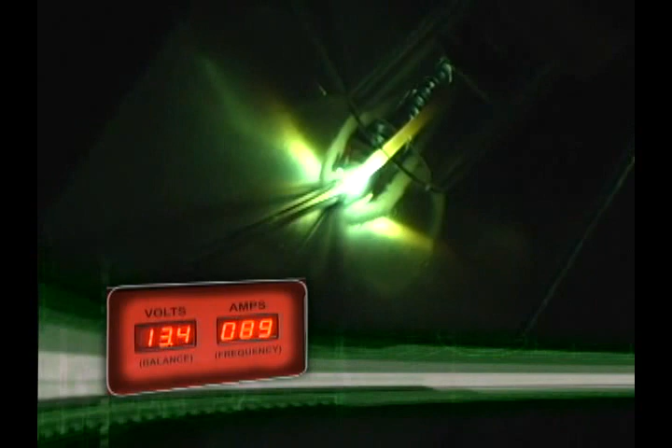Again, remember to tack the panels. You will concentrate the heat on the lower panel and let the filler wick into the upper panel. Make sure you dab the filler into the molten puddle. As the name implies, you are filling a corner, so you are using more filler rod. You are actually pushing the rod into the puddle versus dabbing it. You want to put enough filler rod into the puddle to make a convex bead.

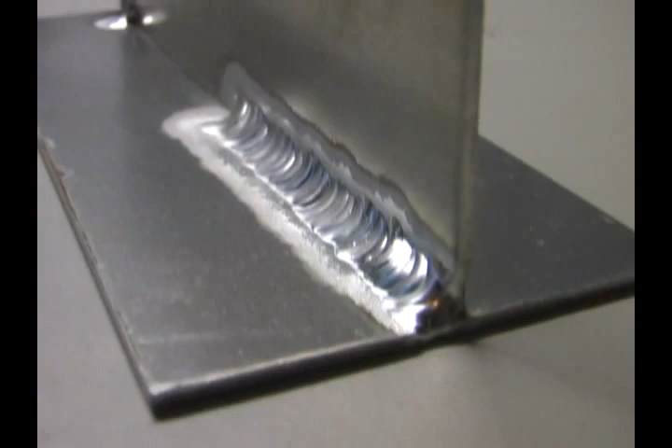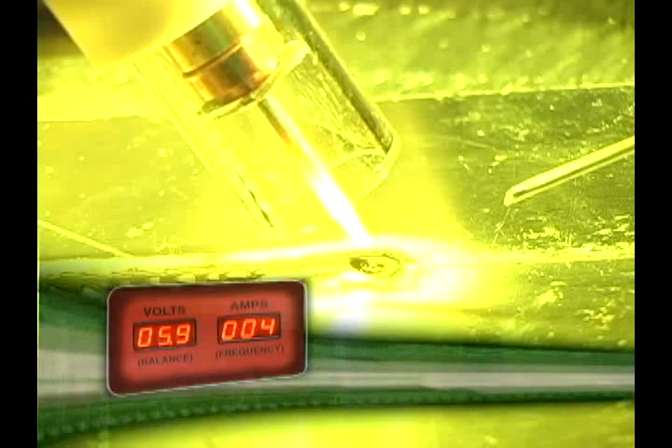We have increased the amperage of the machine to 160 amps to give us the penetration we need in the 1/8 inch aluminum. Also, with aluminum, since we are running in AC and putting more heat into the tungsten, we increase the tungsten diameter from 1/16 to 3/32 of an inch. Other than that, this is just like butt welding thin aluminum. The finished weld is nice in appearance and very consistent.

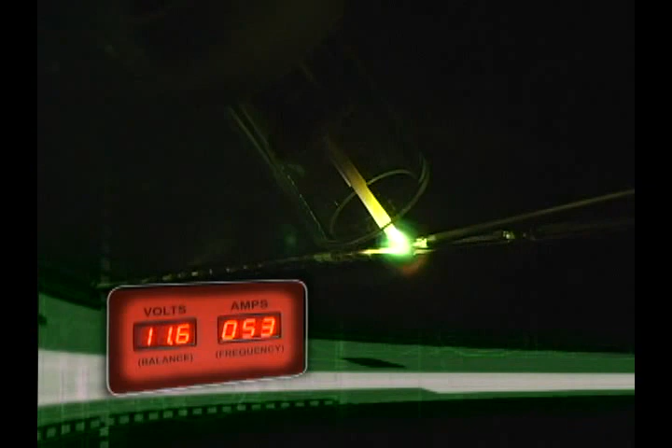Here we are doing a pulsed aluminum TIG weld on an outside corner. A good example of this would be an oil or fuel tank in a race car. We have the panels tacked together. It is a very good fit with no gap. In this specific application, we are able to lay the filler right in the crease and let the machine melt the filler and the two panels together.

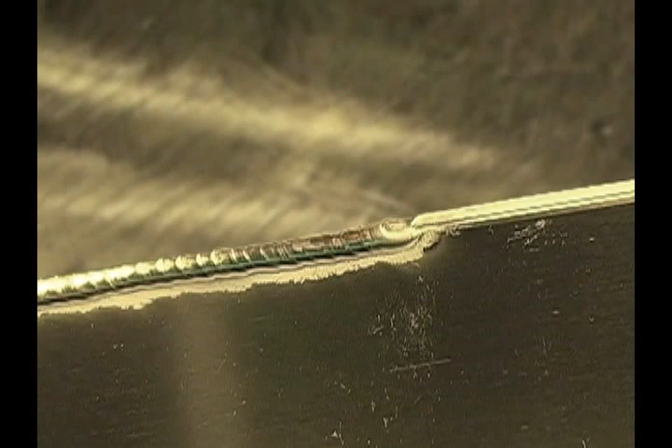The machine automatically pulses between the welding current and the background current. The pulse frequency is set to 2 pulses per second. It really gives you a nice consistent bead appearance and minimizes heat input.